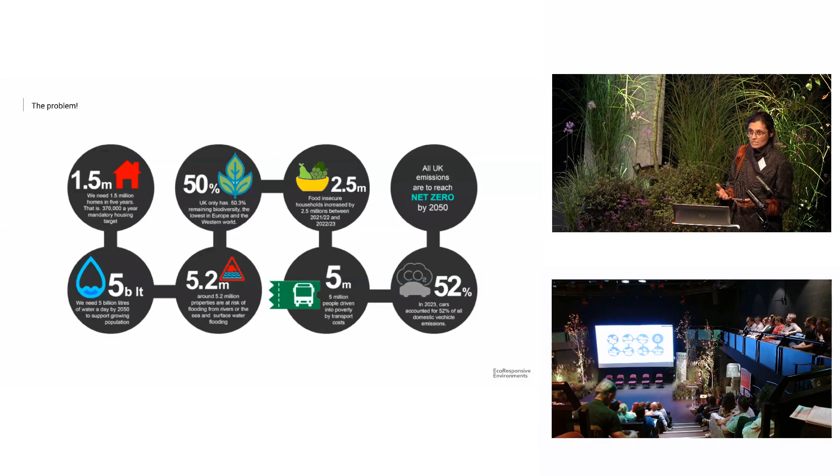So then the question is, how do we structure this integration? It does call for an integrated multi-scale framework for both design, planning, investment, and related development. And I would probably be saying this to the converted, but we do know that a collection of sustainable buildings do not make a sustainable place.

And so our thinking must encompass all scales, from individual buildings through to positively connecting up more strategically with the wider context, and doing that in a way that we can ensure it positively shapes and responds to human needs—immediate needs, facilities, amenities, housing—whilst enabling support from ecosystem services, which then underpins our longer-term survival and existence.

So we do call this approach eco-responsive design, and it is very much rooted in the wider donut economics framework that was proposed by Kate Raworth.

Now, system thinking is absolutely central to this, and this is one of my favorite definitions of system thinking, where we see both the wood and the trees. So we are thinking both strategically and at a detailed scale simultaneously, in parallel.

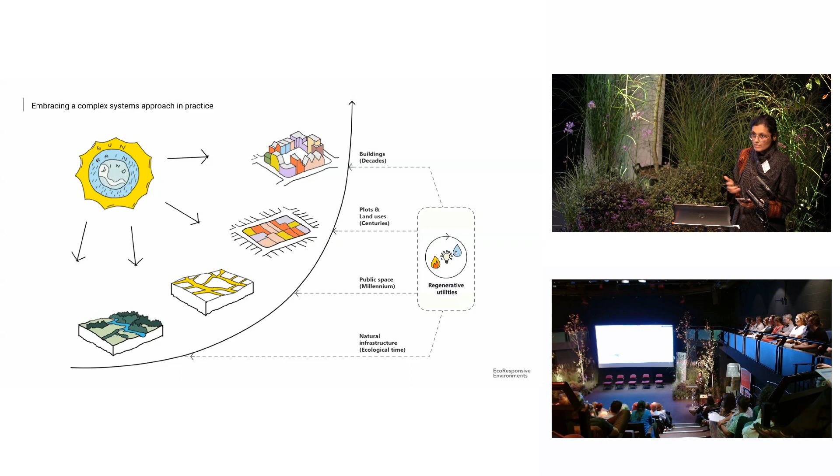Contradictorily, however, in the past decades, investment has largely been driven and focused on layers that constitute the surface order, often at the expense of deeper layers. And so we argue that systems thinking demands, in essence, that we refocus the balance between how we think and design the deeper layers so that it can create resilient underpinnings for the surface order.

So the following slides use one of our projects, the Heath Park project in Runcorn near Liverpool, as an example of how we have implemented this approach in practice.

So just for a bit of background about the project, Heath Park was once the headquarters of the chemical giant ICI. And before we came on the scene, the clients on the project had already transformed the site from being a single occupancy site into one of Britain's leading business and technical parks, housing more than 120 scientific business and research businesses, with their corporate facilities linked into local communities. So that had already happened.

And what the client really wanted us to do was to further transform Heath Park. So it was essentially an urban regeneration project, to move it forward as a beacon of innovation in terms of health and well-being, inspiring climate-appropriate ways of addressing Runcorn's severe health and deprivation issues such as obesity, access to nature, car dependency. Runcorn is a very typical example of a suburban English town, and loneliness.

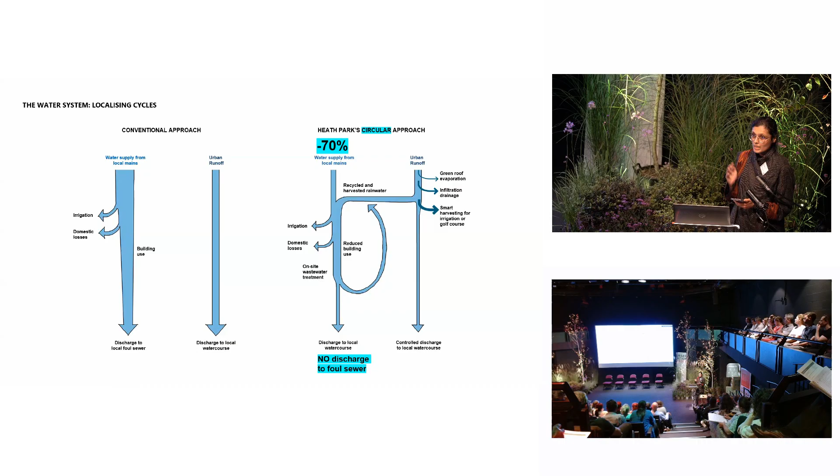So we start with the water system. The project proposes and embraces a gravity-fed circular water system, minimizing our demand for external systems of supply and treatment, whilst maximizing biodiversity and therapeutic value. So there are two components here: we have the surface runoff and we have wastewater.

Surface runoff is minimized with green roofs and permeable pavements, and drainage from roads and parking areas is captured by swales and rain gardens, creating a nature-rich environment.

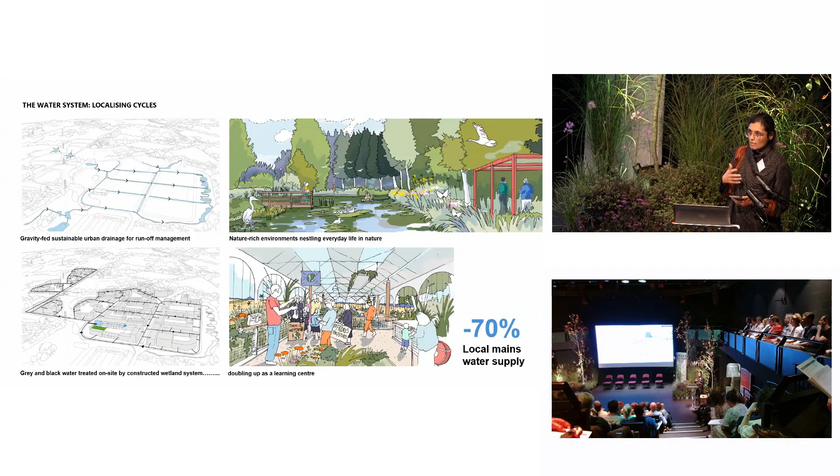And the more important, and probably more innovative side of the water system, was the strategy proposed around grey water and black water. The strategy included the idea that grey water and black water from buildings is treated on site through a constructed wetland that recycles, treats the effluent, and also doubles up as an environmental learning center. So I guess as a project team, we were really trying to push boundaries, moving beyond SuDS and thinking about wastewater and black water in the context of the much wider strategic issues related to sewage and pollution of the rivers.

Next, the green system integrated a variety of ecologically rich productive spaces connected through tree-lined corridors, streets and courtyard gardens with the wider, existing framework of nature reserve, sports pitches and traditional parkland that were adjacent and abutting the site, to create an extensive park system that cuts across and links beyond the red line boundary.

For example, we had a national grid line that cuts across the site, which you can see running diagonally on the top plan to the left, and that was transformed. The national grid easement was transformed into a half a kilometer long wildflower meadow that offered an extensive natural corridor for pollinators, but eventually connected into the existing nature reserve beyond.

Analysis by Liverpool John Moores University, who were an integral part of the project team, using a natural capital accounting framework, assessed the scheme as net positive across 6 key ecosystem service indicators.

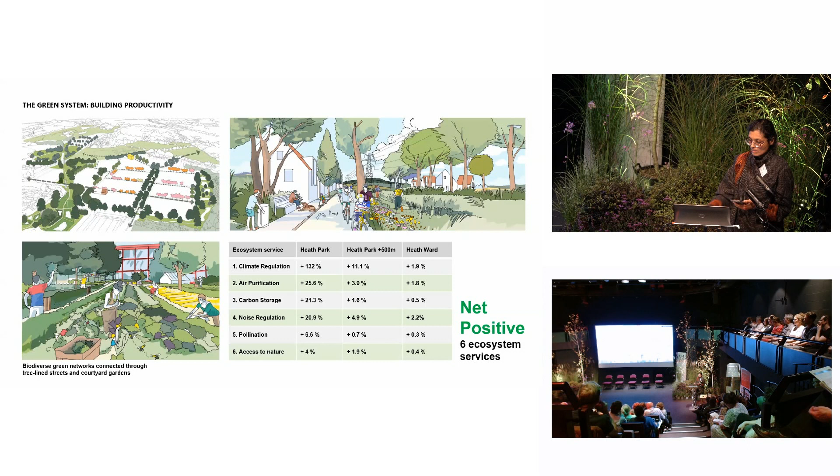Next on to the street system. In terms of the movement system, Runcorn is very much a suburban town, as I said before.

What we understood was that Heath Park is well connected internationally, nationally and regionally, but when we undertook the local space syntax analysis, it revealed a very coarse, disconnected pattern for local connectivity. You can see in the two plans where hotter colors indicate the most connected streets and vice versa. This disconnected pattern essentially imposes car dependency even for shorter journeys.

So to turn tables around, we reimagined the system to support healthy walking and cycling for local travel with a much finer grain connected street layout that stitches the site into its wider context.

At a much more finer grain, elements like planting, trees, and bollards were used with tighter corner radii on streets to calm traffic and filter vehicular routes where necessary, so that the streets can be reclaimed as safe social spaces for play where appropriate.

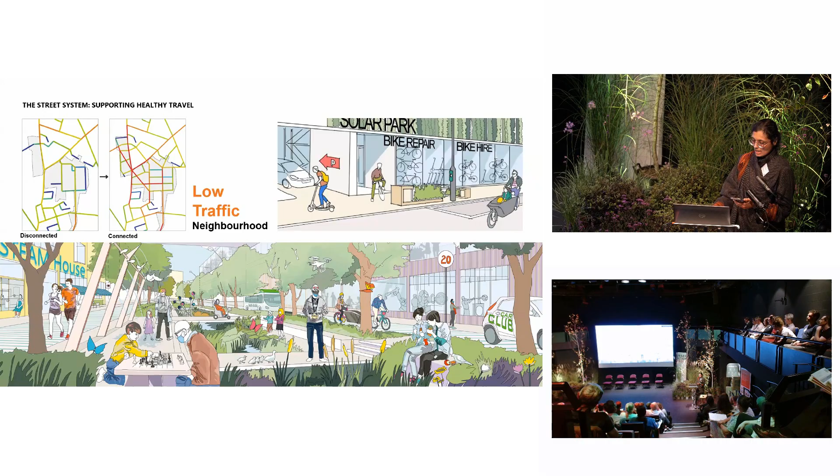With electric club bike hire and increased public transport frequency, the travel plan works towards Liverpool City Region's 2030 net zero carbon targets. Moving to the land use system, which must maximize financial value.

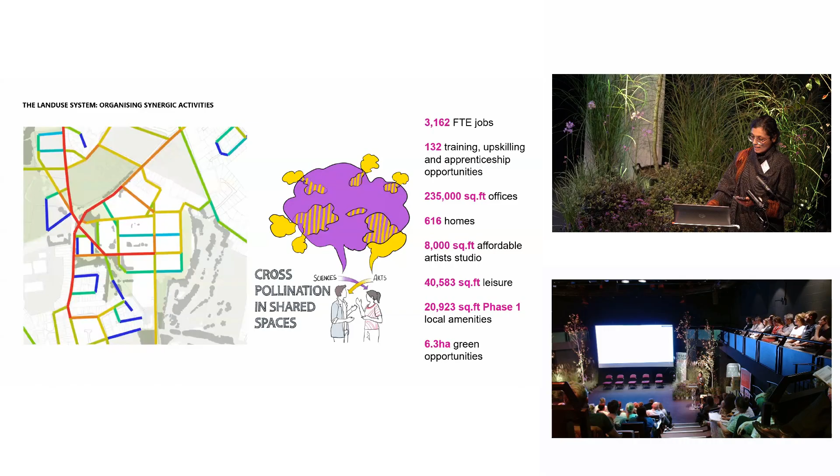We did that by locating activities to take advantage of the street connectivity and the therapeutic value of natural infrastructure, and more importantly, a phasing strategy that enhances the commercial and social offer from day one, enabling existing facilities to continue operation throughout.

So that new and existing communities can grow with the new residents around job, housing, leisure, and green opportunities.

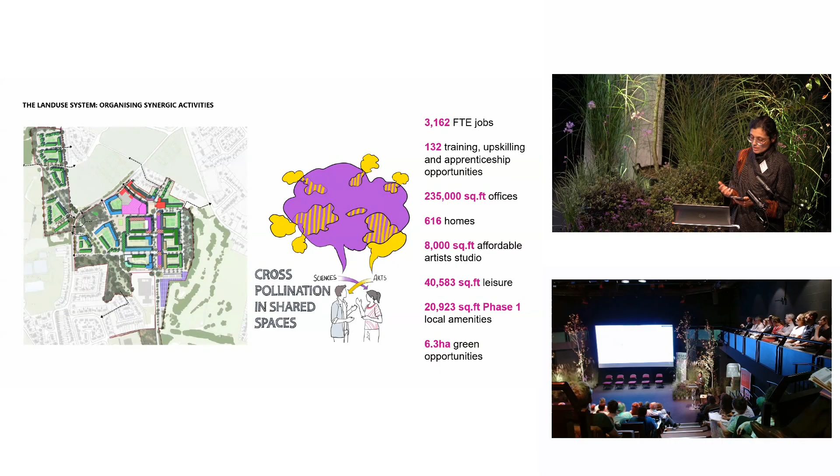Enabling vibrant convivial places, plots form fine-grained mixed-use perimeter blocks with mixed tenures, frequent entrances from street, clear distinction between fronts and backs, and more interestingly, to build social efficacy from relationships that stem outside of immediate family.

The project explored three scales of social interaction: the private, i.e. private back gardens, balconies, etc.; the communal, which is resident-only secure communal spaces within the blocks, such as communal courtyards or gardens; and public spaces, each with a specific purpose.

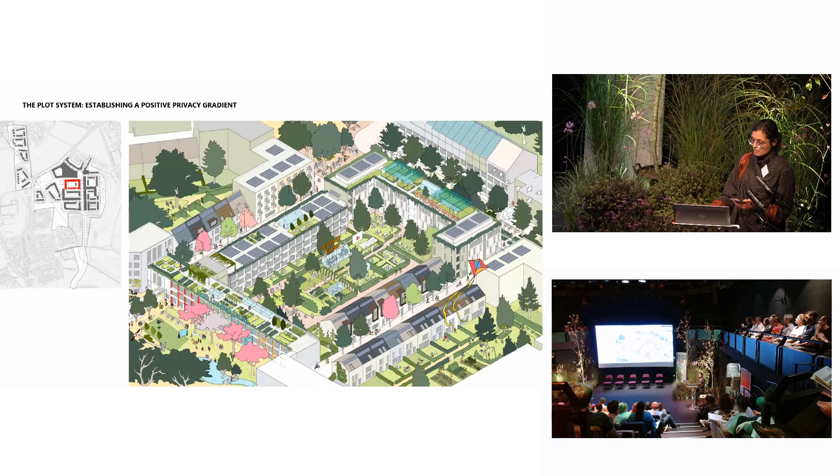Moving on to the building systems, the idea of slow architecture underpinned the architectural strategy, which is the creation of adaptable buildings, long life, loose fit.

For this site in particular, because there were existing buildings on site, they had concrete frame structures with a 12-meter deep floor plate, which really helped us embrace a retrofit-first approach in trying to reuse some of those buildings as live-work units, residential uses, and commercial and lab spaces.

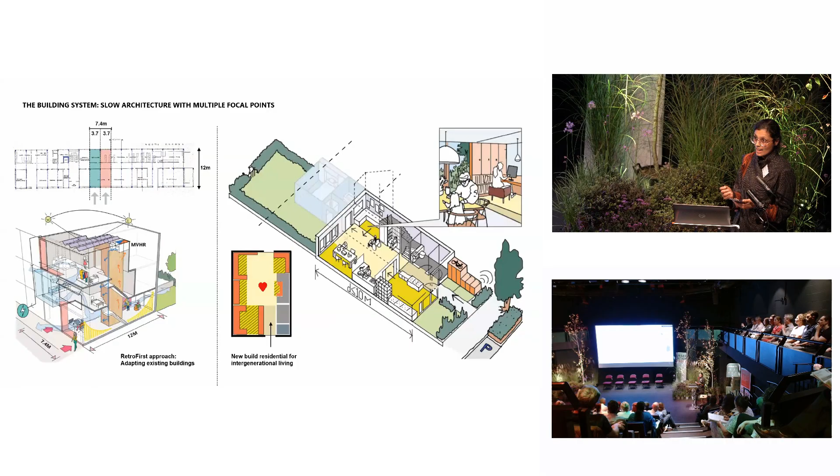The Heath Park's utilities and infrastructure system responded to climate crisis and environmental degradation at three scales: site scale, cluster scale, and building scale. At site and cluster scale, there were regenerative microgrids of renewable energy, water, and waste that maximized energy efficiency and shared resources amongst diverse users accommodated within the buildings.

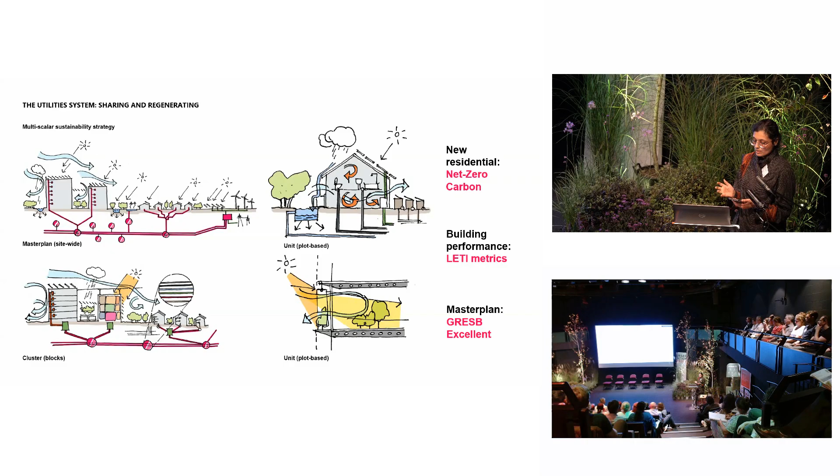At a perceptual level, we learned from the human affinity to the therapeutic effects of nature, more popularly known as biophilia, by building in the idea of fractal organization of architectural aesthetics. So we moved away from minimalist aesthetics to organized complexity within our built environment, not just buildings, but also how we design our open spaces and public realm.

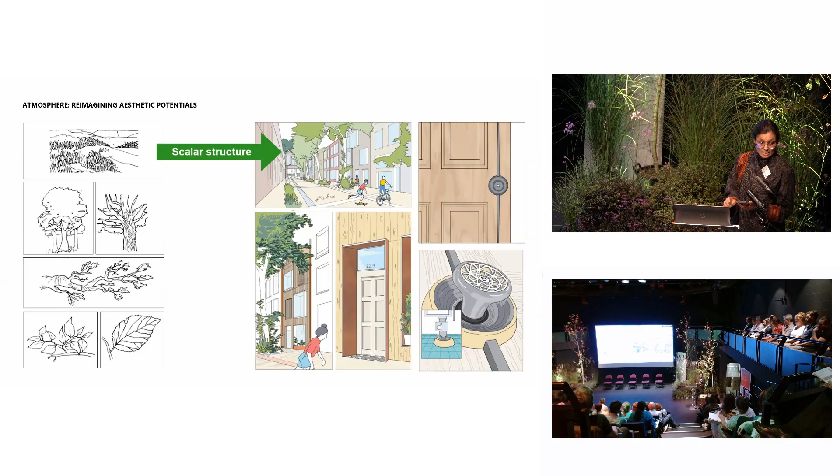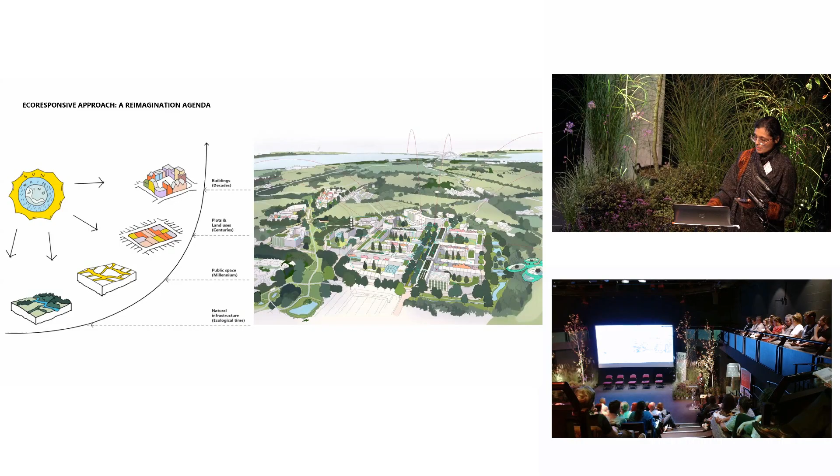In conclusion, the complex systems approach helped us identify a reimagination agenda for healthy placemaking across a range of scales. It collided us with this question of how we can make the most sustainable option also the most viable one. I'll conclude with three lessons that we learned by being part of this project.

First was around client aspirations, development brief, backed by wider political will, which really set the stage up for us on this project. Second was around project management and the absolute critical importance it plays. In the end, a project like this is akin to orchestrating a symphony.

Thirdly, it is the power of storytelling, because, as the environmental communication specialist George Marshall puts it, people may read information in the form of data and figures, but their beliefs about places are held entirely in the form of stories. So we need to work together as an industry to create new narratives and new stories to change existing conventions and underpin a wider political planning policy renewal.